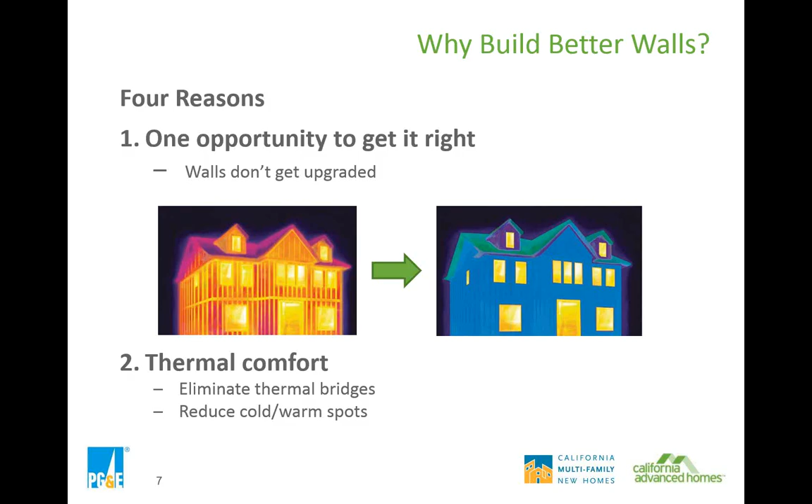The thermal envelope really defines the thermal comfort of the building, which is a big thing that buyers are looking for. Once homeowners start getting used to living in homes that are comfortable in every room and every corner of every room, that's going to be a new standard that everyone's looking for. And there are people building this standard right now.

Next two reasons: durability. Once again, you build these walls once, they pretty much stand, and you want to avoid any kind of liabilities, any kind of moisture issues, structural support issues. So build a strong, thoughtful wall, and make sure that it's also durable from the weather, from earthquakes, from moisture getting in either from the inside or from the outside.

Finally, it is the starting point to reducing every other load in the building. Your walls lower the loads, so you can have a smaller HVAC system. You can have shorter duct runs because you can put a good throwing register from the center of the house out instead of running ducts all the way out to the extremes. Once you have shorter duct runs, it's a lot easier to get those ducts into conditioned space, in drop soffits, in plenums, wherever else you can put them in between floors.

And then finally, it's a pretty great trade-off for more expensive improvements. You can get the walls to a really low U-factor or a really high R-value fairly cost-effectively, particularly if you throw in QII, and those are some of the more cost-effective improvements, which lets you trade off for other, sometimes more expensive performance criteria elsewhere in the home.

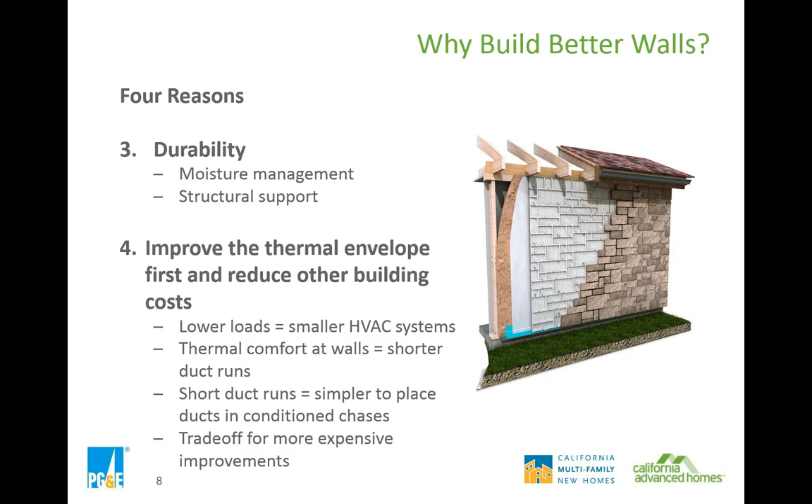So let's talk briefly about what's going on in the code world. As you all know, and Shannon just alluded, we just upgraded to the 2013 code in July, and most production builders are now starting to submit permits to this and think about getting into programs to 2013 code. They're still running out permits that had been granted under the 08 code back in June.

But the new code, the 2013 code, stipulates across all climate zones an assembly U-factor of 0.065. And that's a pretty basic wall. It's your 2x4 with R4 rigid exterior and an R15 high density batt inside. Or if you want to go to 2x6, you can do an R19 plus an R2 rigid exterior at 16 on center.

In PG&E territory, this has become pretty darn standard, this R15 plus 4 concept. In some of the southern utilities, the switch over to one-coat stucco and external rigid is a little less adopted, and even some parts of PG&E territory, it's not quite the building standard, but it's getting very close to that.

You're going to find as I go through this webinar that the need to meet the current standard as well as the upcoming standard is really going to absolutely necessitate continuous external rigid insulation to meet the criteria. The 2016 code change is anticipated to be an assembly U-factor of 0.050 in all climate zones except for climate zone 7, since that's San Diego. You PG&E participants don't have to worry about that.

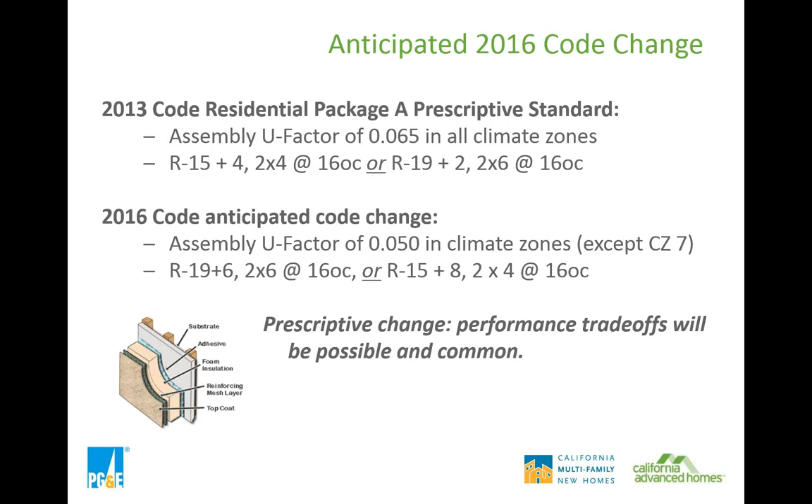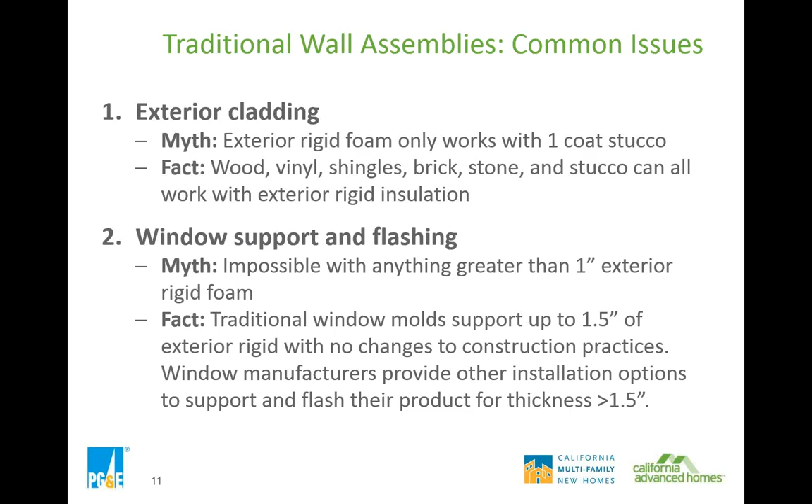Matt, we have a few questions right now. Do you want to take those now, or do you want to wait till you finish this traditional wall assembly section? Let's take them right now. Bring them my way. Okay. So the first one is a little bit long, so I'm going to read it slowly from Gary Farber. It is my understanding that R19 is worth, oh, sorry, I don't know what that talking was. Hopefully you can still hear me. Okay, you cut out briefly after saying R19, so how about you jump back from there? Okay, great, thank you. Start from the beginning.

So, it is my understanding that R19 is worth R17.8 in a 5.5-inch cavity, and that R21 is worth R21 in the same cavity. Okay, so that's the first statement. The CEC's R19 U-factor is very close to the R21 U-factor value. But here's the question. Do you feel that these U-factors reflect the actual insulation difference between R19 and R21 in a 5.5-inch cavity?

Yeah, so in the 5.5-inch cavity, the assumption with the three different tiers that that table showed of insulation R factor or R value is the density of the fiberglass itself, the density of the batt. And so if you're putting in a low density batt, a standard density batt of R19, that's going to get you R19. I don't know of a 17.8 batt for a 2x6 for a 5.5-inch framed cavity myself.

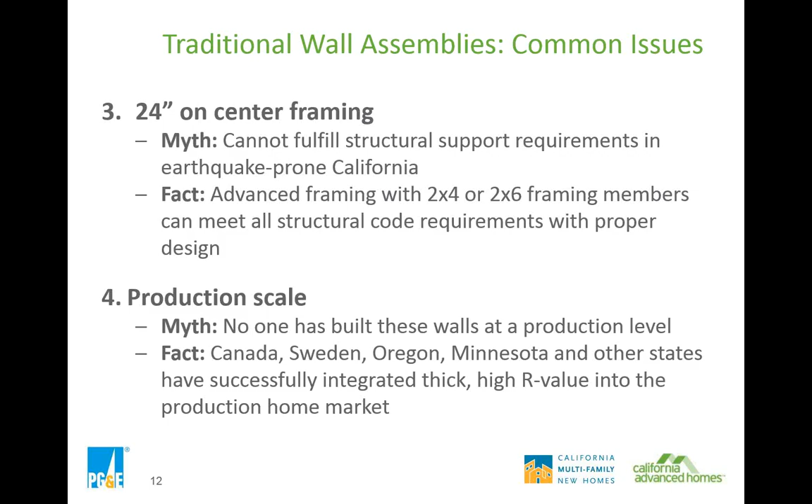So as I alluded to earlier, I was at a great conversation at the CEC during the 2016 code conversation, some of the early stakeholder workshops. And there was, I'm paraphrasing, a conversation of the CEC saying that we don't see this R6 at 1-inch thick, so we're going to need different windows. We need to get to R6 rigid exterior, but we don't see it in a rigid foam board that actually fits our existing windows. We only see R4. And there was an insulation manufacturer that said, no, we can do R6 right now that fits behind the windows. And CEC said, why don't you sell it? And the insulation people said, we never knew anyone wanted it.

So the conclusion from this is a lot of these insulation companies, some of the big dogs that you're used to working with, Insulfoam, Owens Corning, Dow, and others, are starting to produce and put out into the market R5 per inch, R6 per inch, and definitely when you get out to the 1.25 inch, 1.5 inch, R6, or even R9 in 1.5 inch, which fits behind your standard windows. It might be we're switching up to polyiso. It might be that we're switching out to XPS instead of EPS, but there will be products on the market that can reach this. And when these products start getting used in the market more and more because the code is going up, the prices are going to go down quickly. And some of this R4 per inch board is going to start just going the way of the dodo, the way that incandescent light bulbs are.

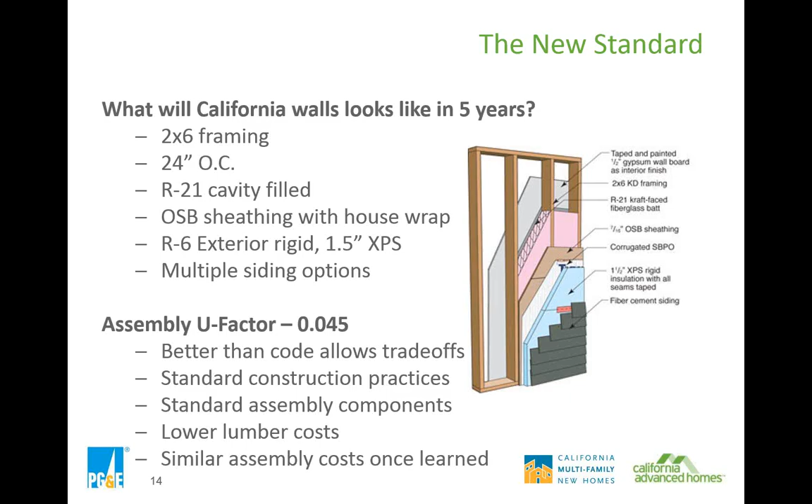I also think there might be a play in the production market, especially for some of our smaller and local builders that are really looking to be the cream of the crop, that are looking to be well above their competitors and really put together a great wall. Some alternative wall assemblies, two of which are the double wall and the staggered stud wall.

So you can do this double wall. You're not having to do an external rigid in this case. You can stick to a standard exterior assembly, no exterior rigid. You still get your thermal break by having that little center chasm between the double walls that is uninterrupted. And you get some really great U factors, into the 0.04s quite easily with a double wall.

It does take some planning with that internal wall of exactly how to line them up, and it's a little bit wider, so it takes some framing planning of how to line up your studs and how to build that internal wall, especially right there as the corners meet. But it's doable. It's being done in other production markets.

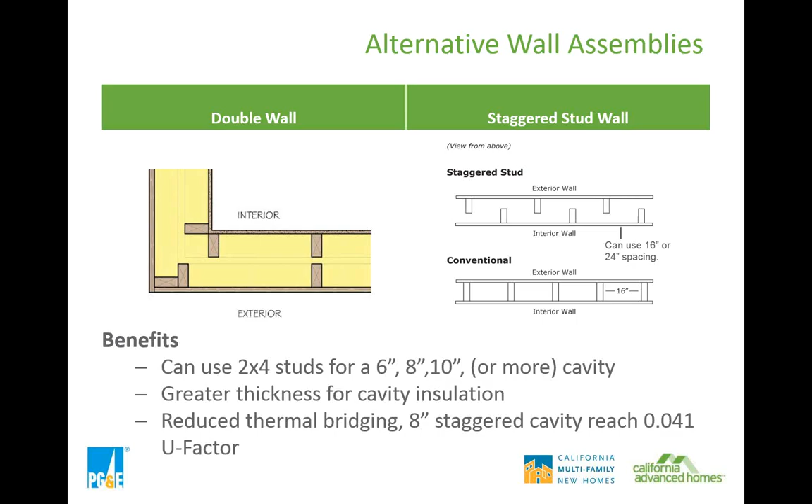I've seen so many photos, I've seen schematics of people drawing in batt that kind of loops through this as an S-curve and doesn't actually go into the corners. That totally breaks the intent of having no thermal bridging. Having those air gaps kills you. So a blown-in fiberglass or a blown-in cellulose or such would probably be the best to fill this cavity properly. But yes, you've got to fill the entire cavity.

Great. Next question regarding hold downs. How do framers install hold downs without lowering the R value on SIPs, because you have to cut large openings for the hold downs to fit? So I don't know enough to speak intelligently about the hold down issue. I would have to get back to you on that. I've heard of it, but I didn't do enough pre-research to answer that intelligently, so I'm going to hold back and not throw out an assumption.

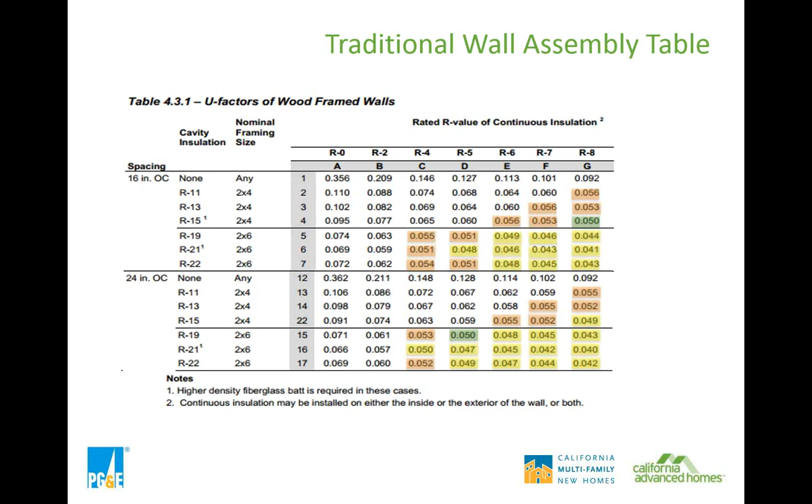So the same kind of framing thickness and framing depth will have a higher U factor, probably by about 0.005 would be my guess by memory. That's totally guessed by memory, so don't quote me on it too bad. But similar, the 0.050 will still be the standard you're being compared to. In order to reach it, or reach close enough to it for trade-offs, you're probably going to be talking about definitely going to 24 on center, probably doing some of the high-density batt, or maybe a spray foam, and definitely doing a thick, rigid exterior.

Great. So next question, how can laths be installed on rigid insulation when using furring nails because they have to penetrate to work? So, once again, I don't know that well enough to speak to it intelligently. So I'm going to shut my mouth and refer you to the Lstiburek paper on Building Science Corp, the free one, number 1406, that was in the references, which I believe talks about that directly. And if not, I think there are other case studies and images of that being done in the Building America Solution Center for free as well. I don't know enough about the detail of that assembly to speak to it.

Okay. And we'll follow up with the slide deck so you can download the link. So Matt, you can help me with the acronym. I know one of them, I don't know the other one on our next question. So the corrugated SBPO, what's that? SBPO, it's house wrap. I can't remember exactly what the 4 letters stand for. Okay. Does the corrugated SBPO or other drainage planes between the OSB and rigid foam insulation break the insulation, potentially bringing in ambient air?